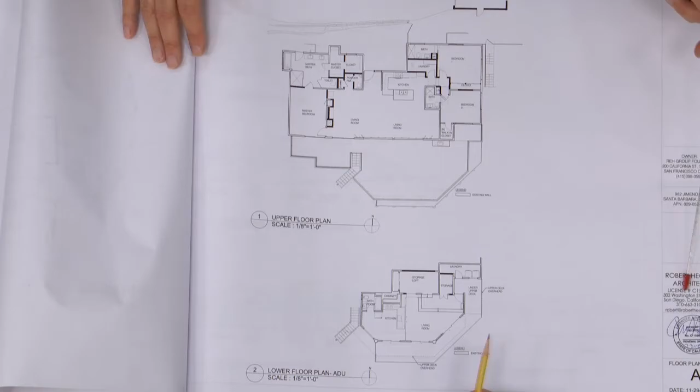Just to be clear, the ADU is where? It's here. It's this whole thing, which is pre-existing, all of it. Okay, and so we're not allowed to make comments on the elevations of that portion of the structure. Regardless, there are no changes. Okay, just so I understand where our limits are. Okay, go ahead.

Other than that, this is the deck above, which is shown on the other plans, which is over the unit, actually serves as a roof of the unit.

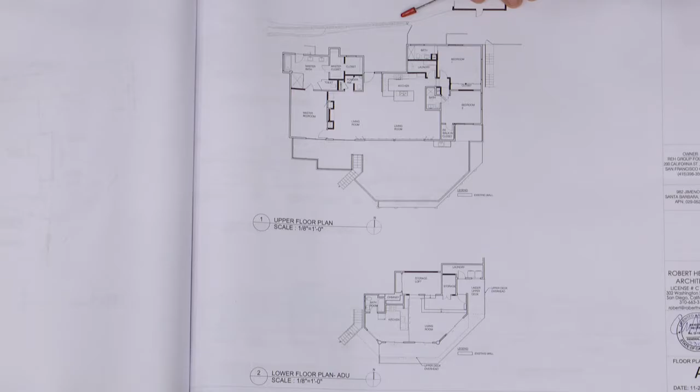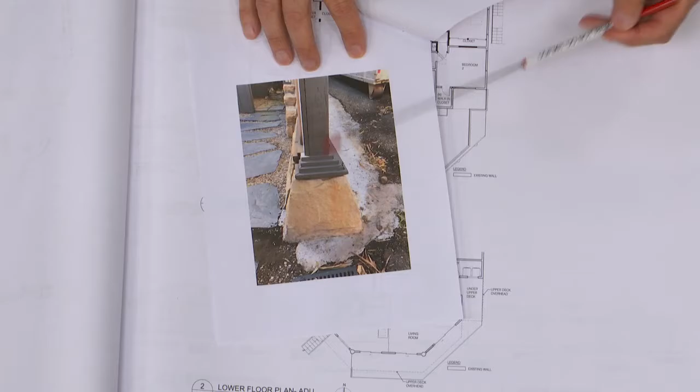This is the wall that we discussed. That was a block wall that was plastered. So you asked me for detail. Basically, we're building a block wall on top of an existing stone-faced base, which is actually a veneer. Within it is concrete. So we remove the wood fence and build a block wall with the facing on top of it at the lower end. Not really sure how deep we need to go because we'd have to dig under it. But this is basically the structural.

And are those drawings on these sets? No, it's a separate. Okay, so...

Did you deal with any stormwater management requirements for the driveway? Well, I talked to the Creek Division, and Cameron, Tim, told me it would be a tier 1 based on information that we had. But what I did do was, I have a bid to do the work, and I put an application with the building department for the driveway. So basically, as before, the idea was simply, it's a broken up driveway, so to put another couple inches on top of it.

So there's some notes and details that have to go on these sheets, which aren't here yet, correct? Just a note. And then we talked about looking at a landscape plan. Yes.

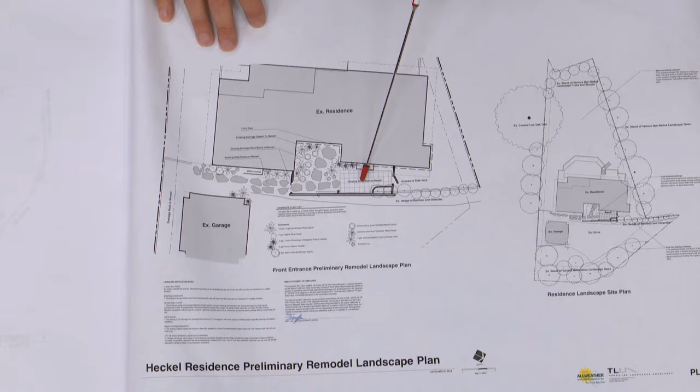So this is the plan that was done by the landscape architect. Essentially, on the backside, we've just cleaned out dead material, as well as here along Jimeno Road and Alameda Padre Serra. So all the new planting is near the entrance, which is really, we're keeping the walkway. There's some permeable material, little concrete squares that you place with space between them. And all this area on both sides of the house and in front is just a lot of gravel, so he's just added some plants into that area.

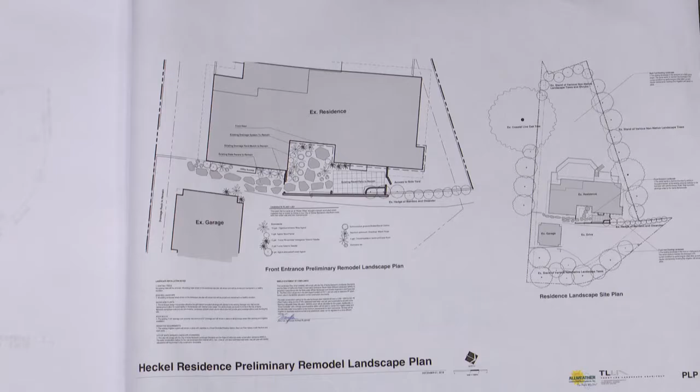And then we wanted to look at a lighting plan and any fixtures. These were included as a handout in the second submittal. Essentially, what this house has now is a closed soffit, plaster soffit, and there are already a number of recessed lights in the soffit, and it has a couple of, three floodlights. So the idea is to put those back as recessed lights in the soffit. Being recessed, they're already dark sky.

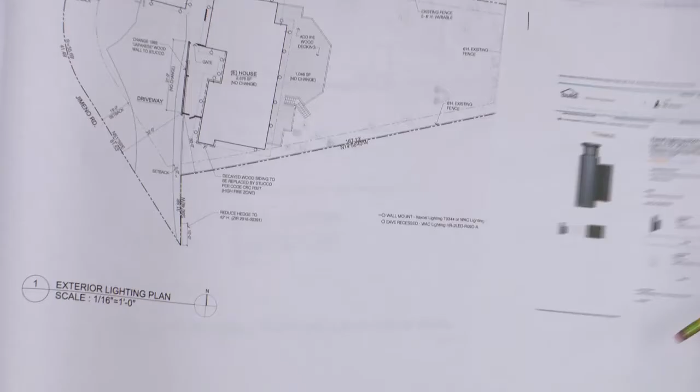We would connect them to an astronomical timer. So then these other fixtures that are on the face, one set has all the functions - it's dark sky, motion, LED. This is the fixture, and the color is a really dark bronze, like the windows. And the other fixture is this one, which is also dark sky LED. That one is going on the more visible front entry area, right here. The other one is for the garage and back over here.

All right, anything else to share? Am I missing any items? I think that answered our questions. Okay, nothing else, then the chair will open the project for public comment. Anyone wishing to address the project can come forward. And David, did we get any written correspondence? No, we did not. Seeing no one come forward, the chair will close public comment and bring it back to the board for questions. Anyone have questions?

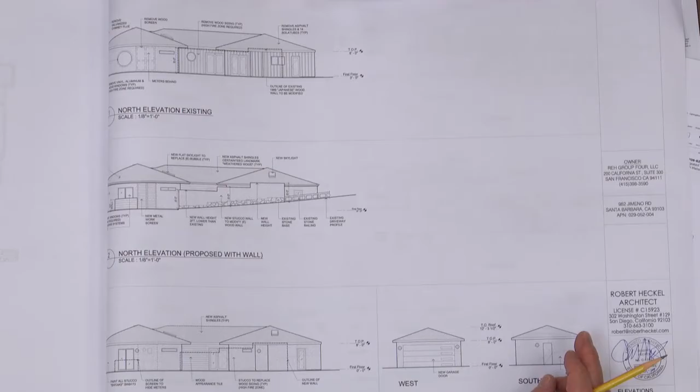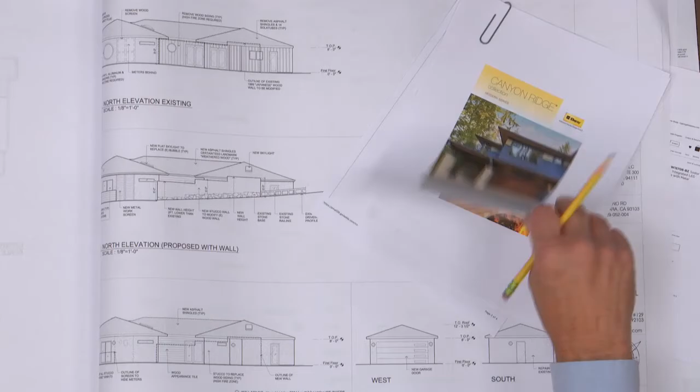Just a couple of details. Do you have any other drawing or catalog cut for this new garage door? Is it on the drawings? I think so. Here we go. So that's the manufacturer. That's not on the drawings though, in this little cut. No, just found the door. Okay, any other questions?

If there are no other questions, let's go to comments. The applicant is here wishing for project design approval and final approval. Unfortunately, because several of his notes aren't on the drawings, I don't think we're in a position to give it final approval. But that might be something accomplished at consent calendar, because it's simply a matter of having him take his catalog cuts and his other information, light fixtures, etc., and getting them onto the set of drawings. Other comments?

Yes, Lisa. Just looking at the front entry - what sheet are you looking at? On the landscape plan, the last sheet. Just thinking about a lot of plants that need really, really dry conditions on the north facing wall there, in the entry, against - barrel cactus and some really spiny things. You might really look at, I can't really tell the scale there, so you might just consider the ultimate sizes of some of those things and having them right next to where people are walking.

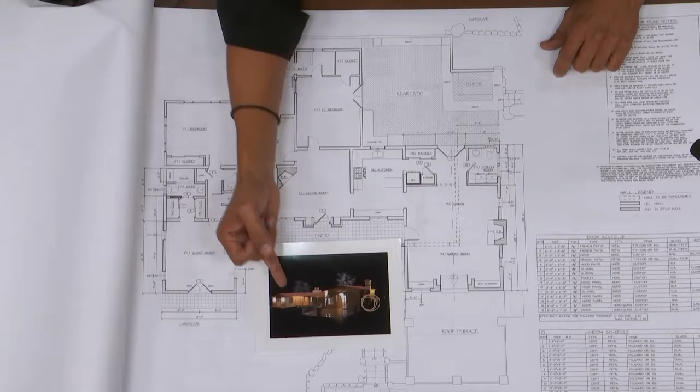One of the comments from the last meeting was about using these windows on the existing kind. I tried to use one of the windows on the new addition, which I did here. I changed this gate, this door from here to here, and created the same style courtyard, which I can show you here. So we're looking at a model.

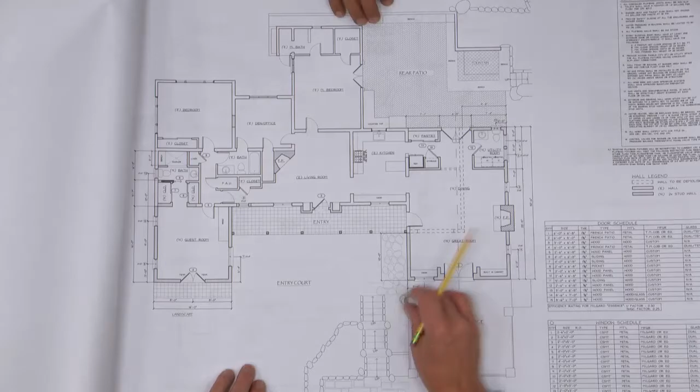Another comment was about the columns - on my former project I took some out, and now I'm keeping the same character. Can we see those on the elevation? Yes. Okay, so that's this? Yeah, that's this.

Another comment was on my vent. Now I'm going to the kind of all clay vents, which go with the architecture. Another comment I recall was on the chimney cap. Correct - for this, it's the existing as it is, I just don't touch it.

Another comment is the lights. Can I change the light? Due to my being unaware of the timing for my meeting today, I wasn't able to bring my lighting style, so I have my phone here.

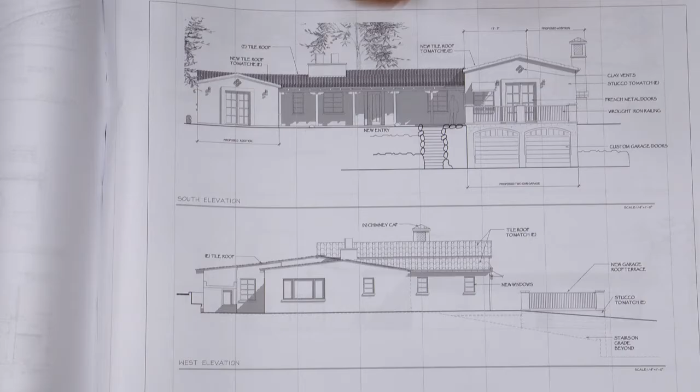Another question is the color. My color scheme is going to match the existing. I don't have any new color board, just to match existing. The color of the existing house is named Extra White.

Anything else? That's it. Is there - and have the details? Yeah, the details are over here. This is the details for the rake, for the eave, some of the railing, and windows and doors.

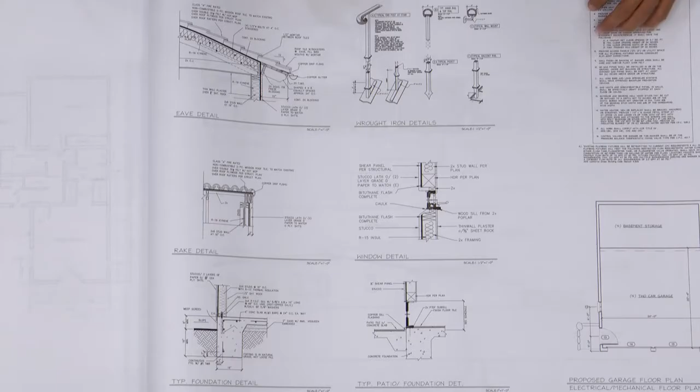Who has questions? I see your photo - here's that. Pass that down to you. This one? Thanks. Anyone else? Are we on questions?

Yes, go ahead. What about the trim colors of your windows and doors? As we can see in the pictures, over time there have been different windows. If we look at the pictures, we see three different windows, but the color we're looking to match is this light gray one - that's a turquoise blue? Yeah, what we might call Santa Barbara blue, which is the one you see on the rendering. Okay, thank you.

I did have a question I just now realized. You said you had a window to that side, where does that show? Let me go up to the floor plan. It doesn't show here, but it shows on the rendering. But it doesn't show on the drawing. Oh yeah, I need to make a section. So you just haven't shown it yet, because it's on the floor plan only. So if we use the photograph, it's that window right there? Exactly, which is right here.

All right, other comments or questions? I think it's a nice looking project myself, so I'm in support of it. Got a neat colors looking home.

And for the light fixture. Nice. That's great, you just need it on the plan. Need you to stay seated and talking into the microphone, this is all recorded and you're on live television. Oh, thank you. Sorry.

Sorry. Okay. Any other comments?

I think my comments are that you've done what we've asked you to do. I think everything looks good. I think it's unfortunate that we weren't able to find a way to reintroduce this style of window somewhere, but because this arrangement's a little awkward, it's really just an architectural decision. From an approval standpoint, it doesn't present problems to me.

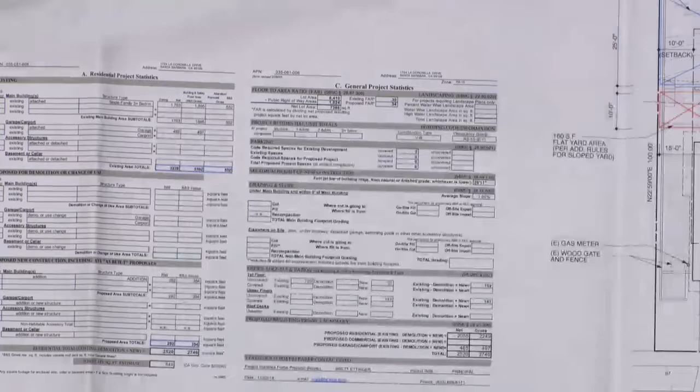What I'd like to do is acquaint you with the immediate context, the neighborhood context, with a variety of photos and a context map that highlights in gray some of the, there's at least 14 within a stone's throw, existing two-story homes. I can pass these around for you if you'd like, so you can use the map to get a sense of where these houses are. They offer a variety of architectural vocabularies, everything from quasi-Spanish colonial to post and beam to sort of a modern ranch-style home.

So these are just to sort of set the mood for neighborhood context. Again, many homes on this street itself and on the adjacent cross streets. I'm getting towards the end here, thanks for bearing with me.

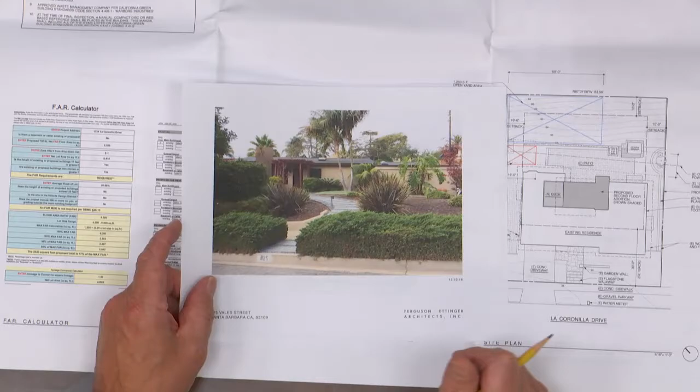In any event, our proposal here today is to add a modestly sized second floor addition to this existing 3-bedroom, 2-bath home. And what we've endeavored to do, I'll turn to the floor plan here in just a second. That'll do it for the photos, thank you.

What we've endeavored to do with the proposed addition is be sensitive to both the immediate neighbors to the west and east, as well as the neighbor directly across the street to the south, and in the bigger picture be sensitive to the neighborhood context in terms of the general massing and our architectural vocabulary.

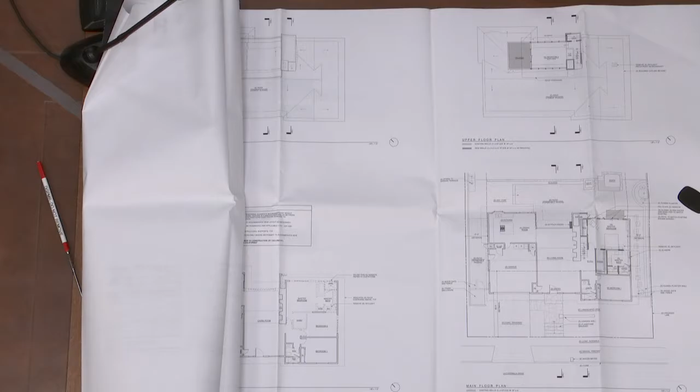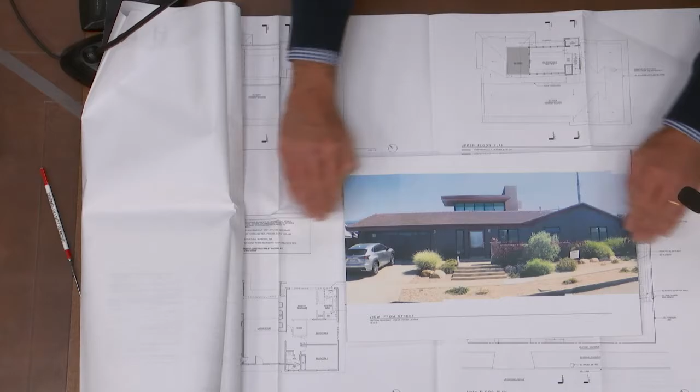So in doing that, do you have the rendering from the street, the proposed rendering? Yeah. In doing that, what we've done for sake of sensitivity is several things. Number one, we've kept the addition small or modest, about 292 square feet net and about 354 gross square footage. Number two, we've placed the addition in the back of the house, about 4 to 5 feet past the existing east-west high ridge line. And number three, we've positioned the addition in the center of the house so that the massing is in the center of the lot and not at the edges or the side yards, out of sensitivity to each of the neighbors.

We've also endeavored to keep the profile as low as possible with an 8-foot plate up above, as well as a flat roof. We've opted for the flat roof for two reasons. Number one, we can keep the profile lower by not using the existing gable roof profile up there. Number two, we can get some larger overhangs, in this case 4 feet to the south, 4 feet to the west, and we believe that will really help during the daytime with a heavy shadow line and further articulate the project.

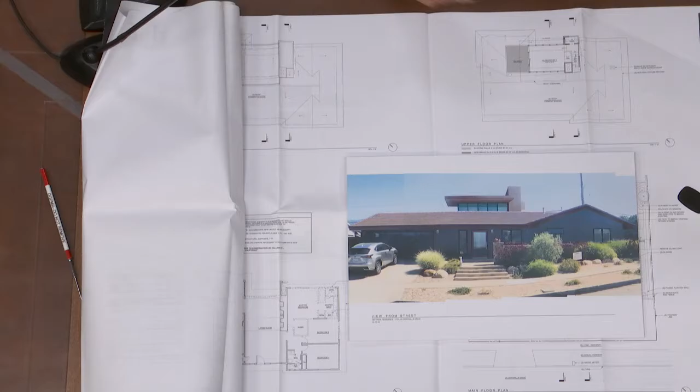In addition to that, the material palette for the existing house—this photo of the house in the renderings is a little deceiving because that brown plaster is in shadow. You have those, here we go. Where they went, the existing house, yeah. Thank you.

Going to be in this part. Oh, it's in there. There we go. That's actually a better indication of the color of the house right now.

But as you can see, what we've tried to do with the addition is not use such brightly contrasting materials and colors, but start with the darker earth tone plaster, key off that, and use it on all the proposed walls upstairs. In addition, to further recede the project, we'll use a dark bronze anodized window frame throughout. To integrate the entire project, we're proposing to paint the existing window frames to match, as well as paint the existing trims and fascia board, so the whole project feels like it may have been done at one time.

I guess lastly, in terms of nighttime appearance, what we're proposing, we have the material board. That's pretty good. That's the real one there. Thanks, Mike.

In terms of nighttime, one, we're not going to be proposing any drywall in the ceiling since it may be visible from down on the street at night and might reflect too much. Instead, for the entire ceiling, as shown in the reflected ceiling plan for the upper floor, we're proposing a medium-toned wood panel to warm things up a bit.

And essentially no ceiling lighting. I don't believe in putting recessed cans and lights on the second floor, so we're not going to have any ceiling lighting in there, just a fan. There'll be one wall sconce and a surface-mounted light at the top of the stairs that won't be visible.

Lastly, just taking the extra step, we'll be using upstairs at least a bronze-tinted glazing, so that at night it will really be quite diffuse, especially with the warm-toned ceiling and no ceiling cans.

I believe that's about it for the presentation. We have some other things here, like proposed lighting fixtures, et cetera, if you'd like to see those. But our goal was to really stay modest, keep things in the back, keep things in the center, keep things low, and use materials that recede.

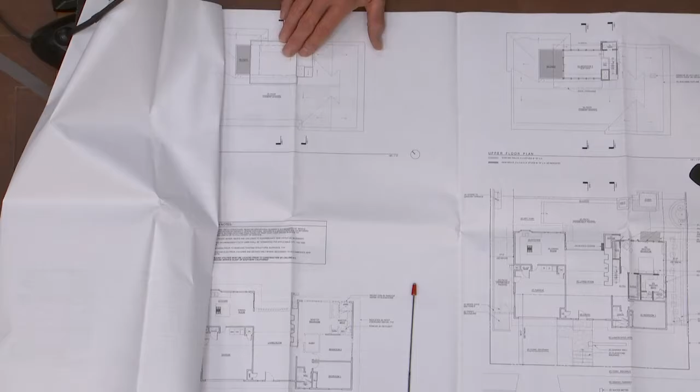Yes, thank you. I am looking at A2.1 and wondering if the roof plan and the upper floor plan both have their own individual decks, and if you could talk about those. Pardon me, I didn't hear the question. I'm sorry, if both the roof plan and the upper floor plan each have new decks? No. The deck, which is enclosed by a 3-foot-high parapet wall, only exists at the second floor level, right off the proposed bedroom. What you're seeing in the roof plan is just the deck beyond. Deck just for below, got it. Okay, yeah, thank you for clarifying that.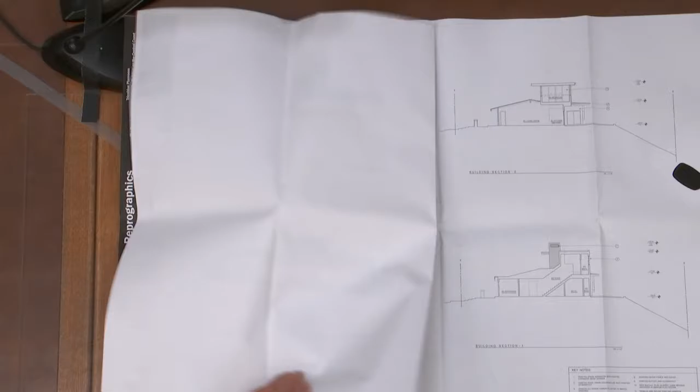I forgot to mention that the deck is sunken into that existing roof about 3 feet. Do you have, while we're there, a section or an elevation to show that? Yes. And we also have a cross-section. Okay, these two cross-sections really don't show the deck, but this one — oh, we don't have it. Okay, so from the street, we're going to see a bit of, is that stuck up? Yes, so that shows up. You really don't see it. Yeah, you don't see it there, but I want to see it on... okay, so that's what we're seeing right here.

So to get your 42 inches, is this an open pipe rail? We're proposing just a simple — haven't gotten there yet — either a metal cap that's 2 inches thick that provides for the 4-inch maximum clearance. So just a single band that's open in between? That's how I'm reading it. Yeah, just for a little articulation there. All right, other questions?

What is the material of the roof, or is that changing? No, it's not. That existing roof is a heavy cement shake. It shows up here for you, you can see it in the photos. It's fairly... 10 years old.

And what are you thinking on the chimney cap? Is it a screen or something? Yeah, we'd like to hide the spark arresters. We'll be looking at painting the spark arrestor and then also putting in a welded wire mesh screen, probably a painted black screen to go along with the other dark elements.

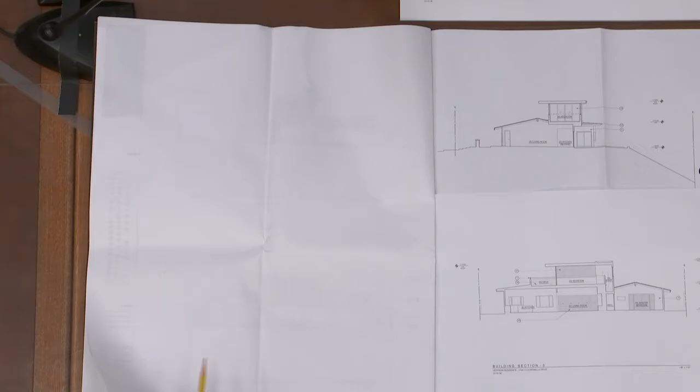And then, under code, are you required to have a light off the set of doors that's coming onto this deck? What we're proposing is just some recessed low wall lighting on the deck itself. You think that'll pass muster? I'm hoping that it does because we don't want to put lights out there. And no lights in the soffit? No lights in the soffit. Or the ceiling? Correct.

And you don't have gutters on the front of the house on the first level, but I noticed there's a downspout gutter here. Is that just for the flat roof? That's just for the contained, parapeted flat roof. And then we have a gutter in the back that has a downspout, so you don't see that from the front. And that's anticipated to paint out to match the adjoining wall? Yes, that's called out, I believe.

And the roof material on top of the flat roof is going to be what? It's a PVC membrane roof. I don't think it'll be visible, but it will be. Do we have a color yet? Not white and not black, so in between - probably a medium gray.

And that's the whole project for our review. There's some other stuff going in the inside, but other than that, yes. And the existing trash enclosure may have already been blessed by the city because of this other work? Yeah, this went through a thorough interior remodel about 8 or 9 years ago, I believe, so that may have been taken care of. And all were modifications for some existing side yard and front yard encroachments.

So David, is this still going through staff review? Is that where we're at this point? Yes, however, if the board finds that the project is supportable for project design approval, you can make those comments to that effect.

All right, okay, other comments? I guess I had one additional question. The neighbor across the street - I was out there this morning just double checking the site. I know the street pretty well because we've looked at several houses, in fact one just 3 or 4 houses down. Has these folks talked with the neighbor directly across the street?

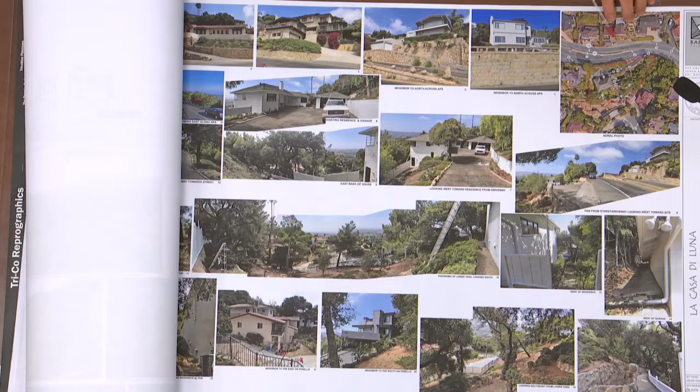So there's an aerial map in the top right corner, which also shows where the photos are. Along the street on the north side of APS, there's a series of 2- and 3-story homes, shown along the top. Our immediate neighbor to the west is also at the top left corner of that sheet.

You'll notice directly across from the site there's a large, probably 10 or 12 foot high median wall that divides the eastbound and westbound sides of APS. It's also significant to note that neither from the driveway across the street looking towards the site, nor from the median looking towards the site, can you see the existing house, nor will you be able to see the proposed work, because there's a probably 15-foot high hedge right at the property line along APS.

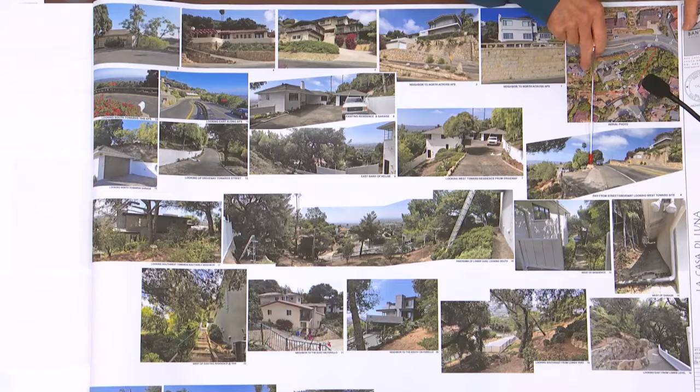Let's see, there's a good view of that. You can sort of see it here, just underneath the aerial photo, where you see both the houses on the north side of APS, the median wall, APS proper on asphalt. Then there's a drop from APS to the site that varies from 0 at the driveway to about 7 feet once you get down to the garage in this location. So this wall right here adjacent to the garage is a 6-foot wall. The garage comes up above it, but then the street level is even above that.

Then there's a variety of photos that take you through the site. This is probably the most revealing in terms of what is there now, the existing house and garage. The site is quite steep, I think it's over a 40% average slope.

Looking from the southeast corner of the site down towards the backyard area of the site is this long panoramic shot, a series of 3 shots. So you kind of get an idea what the backyard looks like.

But there's also this whole section of the site, which is an oak grove, also quite steep, which we're not touching at all. We're not disturbing any oaks, and there's no plans for any development there. But there's also significantly a drainage course that picks up water off of APS and a pipe that comes under APS that drains along the easterly side, then passes over into our neighbor's yard to the east and actually goes under their house, comes out under their driveway, and empties down onto Farella Road down below.

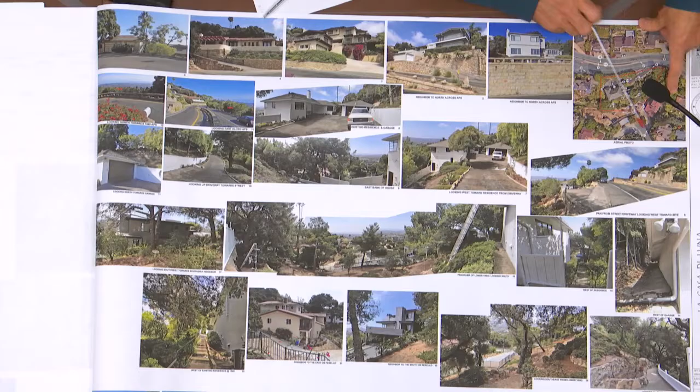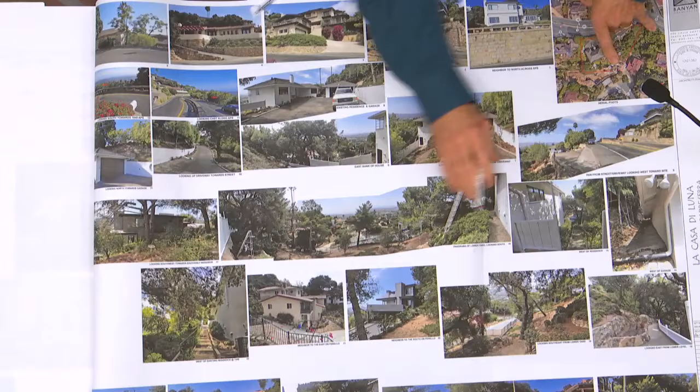You get a really good idea of how steep the site is with these photos taken from down below, bottom left corner. You can see I've labeled here where 1049 occurs. This white building appears in the distance - that's the existing house for this site. And here's Farella Road down here.

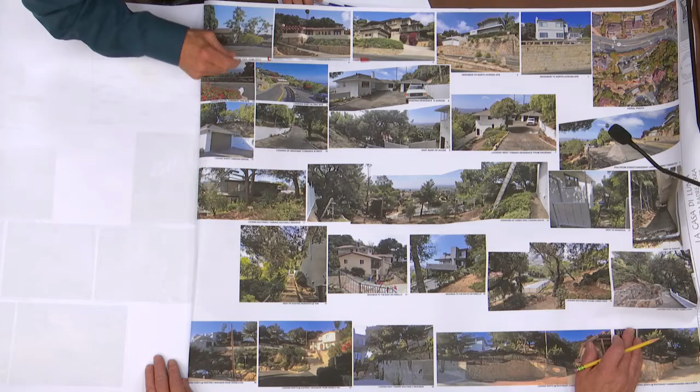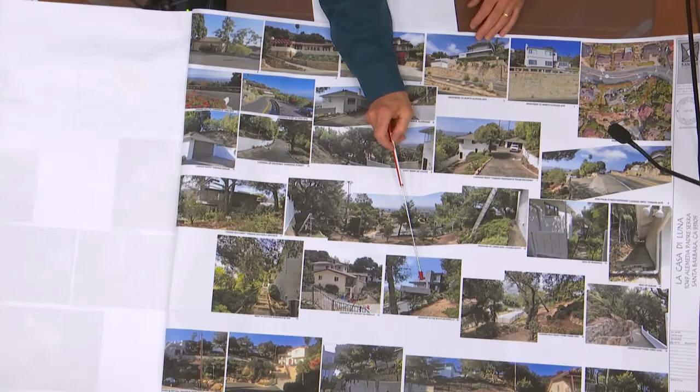So there's lots of retaining and very steep grades up to houses on both sides. This is the house just below our site, which was built in the last year and approved by this board. And this is another shot of the house immediately below us, and the house immediately to the east. Here you get a little bit of that parking area I was referring to, which is also a permeable paved area.

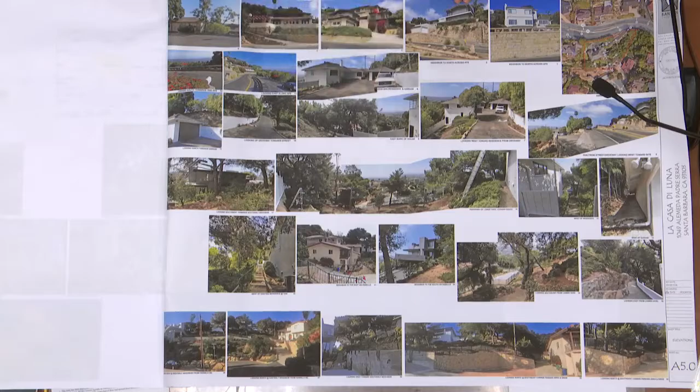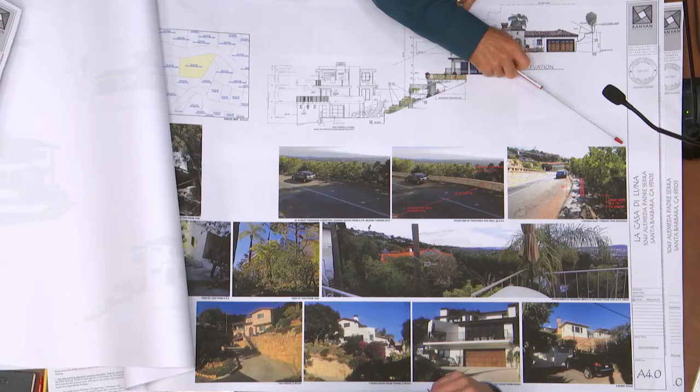We added a few additional photos with this supplemental sheet because part of the proposal is to add a site wall at the street. Currently there's a drop from APS down to the site that varies from 3 to 7 feet, which is unprotected other than this hedge and some intermittent boulders. So we want to create safer pedestrian protection there, as well as protection in case any cars should veer off the road onto the site. This is a photo sim of what that would look like - it's 42 inches high, would be stone to match what's happening across the street on APS, or at the median, rather.

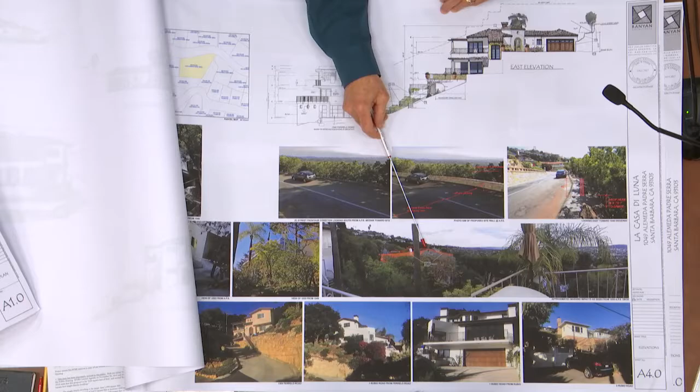Bottom middle of the page, the adjacent property owner at 1055 was kind enough to let us take photos from their site so we could evaluate the visual impact to them for the additions, so you can see how, at least from their viewpoint, the visual impact is minimal. This is also our neighbor at 1055 from our site, looking up towards them. They're roughly 2 stories above us, and this is also part of their residence right here - you get a corner of it.

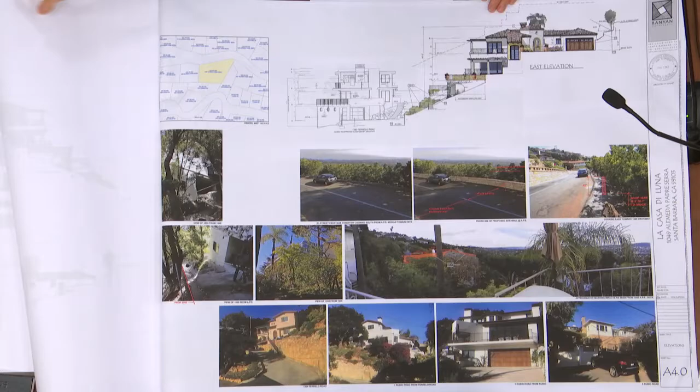Excuse me, sir, this is a public meeting. I'm going to ask you to sit in the seats, please. This is being televised, you'll have an opportunity to ask questions - you get 2 minutes to address the board. Gotcha, okay, so if you could sit back down in the audience, I'd appreciate it. Thank you, continue please.

Maybe I'll just go to that because it's clearly shown there. So here you get an idea of that progression. This is sheet A2 I'm looking at right now.

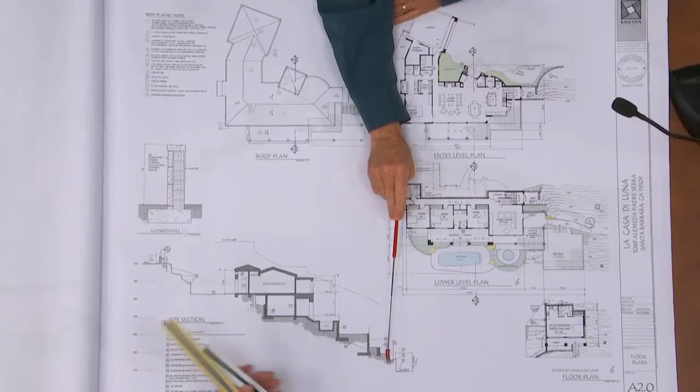Existing driveway of our neighbor shown at the bottom, and existing wall, then the 2 series of 3.5 foot high walls, the 7.5 foot high wall, which creates a flat, usable outdoor area for my client, and then another 7.5 foot high wall, which creates the surface for the pool area.

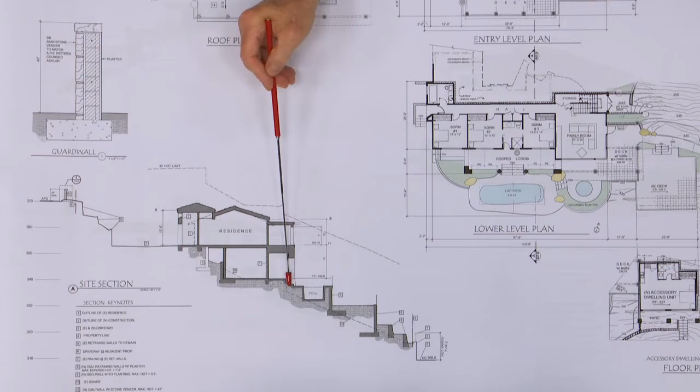But these walls are shown at their worst condition because they are curving. In fact, all of these walls eventually die into grade where they terminate, so they're progressively getting smaller as they go to their ends, which is shown on the elevations.

So again, we took the section through the worst spot, both to the east and to the west. They either terminate into the building or they die into grade as the grade goes up the hill.

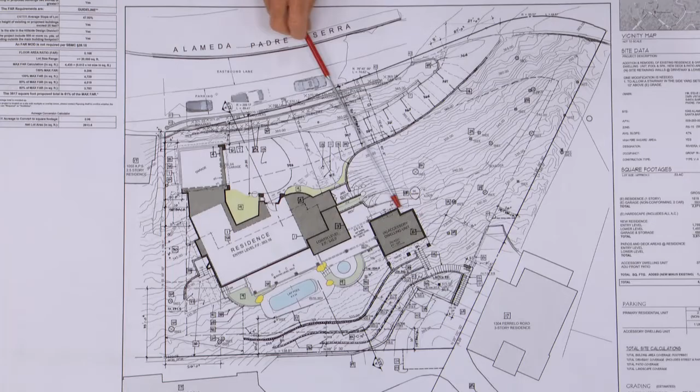Now, although it doesn't fall under the category of needing design review, we are proposing also an accessory dwelling unit. Because it is intimately tied in with the retaining walls, the grading, and the stairway we're proposing, I'll just review it briefly. Basically, it's a structure that's buried on 3 sides, and you can see how that works in the elevations.

Most clearly on the east elevation, you can see how at the upper end we're having to step down from an existing pathway that's there now, and you'll see some steps shown in plan onto the roof of the ADU, and how much of it is below grade.

You can also see that the stairway is basically on grade. So this dark line shown on the east elevation that runs alongside the ADU and picks up and turns into the stairway shows how that stairway is just following along on grade.

The other significant addition to the residence is the entryway, which you can see on the north elevation, and we're incorporating some stonework on the building, as you can see.

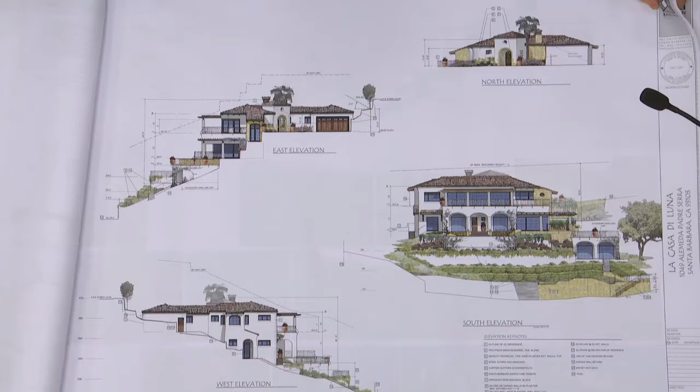Okay, is that your presentation? Yes. Okay, thank you. Before we go to questions and comments from the board, the chair will open it for public comment.

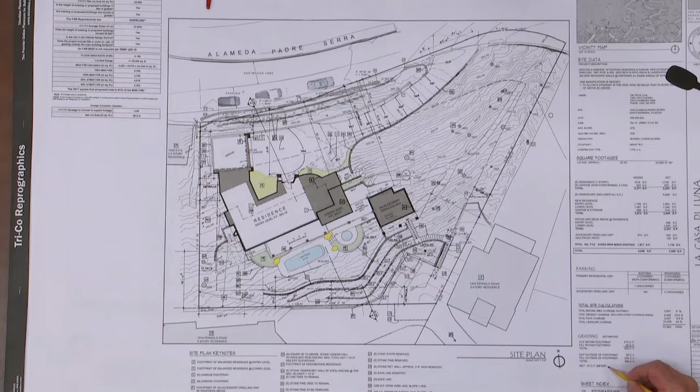I have a question, go ahead. Do you have a general idea how much fill or cut is required? Yes, we did an approximate calculation, it's on the first sheet at the bottom right there. Let's see, 300 cubic yards of cut, 25 cubic yards of fill, for a total of 300... 275. And then that's within the footprint; outside the footprint, 35 cubic yards of cut, 355 cubic yards of fill, for a total of 385. And you're importing 70 cubic yards. So that's about 6 to 7 truckloads. Okay, so the attempt was to get as close as we could to balancing on site.

There is considerable grading, most of it under the house. But yeah, other questions?

Do you know how you might be addressing stormwater management, or is it too early to go there? We've had some preliminary discussions with the civil engineer about it. We are Tier 3, so we will be required, but if we make the driveway and most of the exterior hard surface permeable, it's very likely we would not need to retain the water on site, just percolate it on site. We have areas for doing that, given the retaining walls we're putting in. So that's the general plan.

Okay, other questions? I have a series of questions. You referred to the hedge up on APS. Is that hedge on the property or is that in the public right-of-way? I think it's those. That's a good question. Looks to me like it's all, except maybe a little tiny bit right here, that we're all on the property.

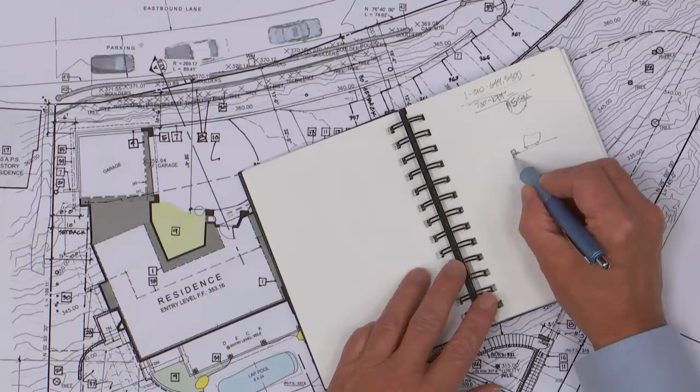So what you have is this is APS, and this wall drops down, or right now it drops without this wall. You can see it on the section that shows it, and the trees are clearly like that. And so that's what we need to understand. Does he need to get a zoning exception, et cetera? So that would be part of your review?

Yes, the applicant did put in a request for evaluating the height of a wall to be considered at the street level. So I will check in with our zoning staff on whether or not that hedge would also fall into that same criteria. And then my other question is, it appears that a portion of this new retaining wall, that's the stone wall you showed.

That's this right here, right? Yeah, it's not retaining, it's just a guardrail. Okay, and so part of it appears to be proposed in the public right-of-way, and part of it is on your property, correct, within 10 feet. And as long as it's below 42 inches, you're okay.

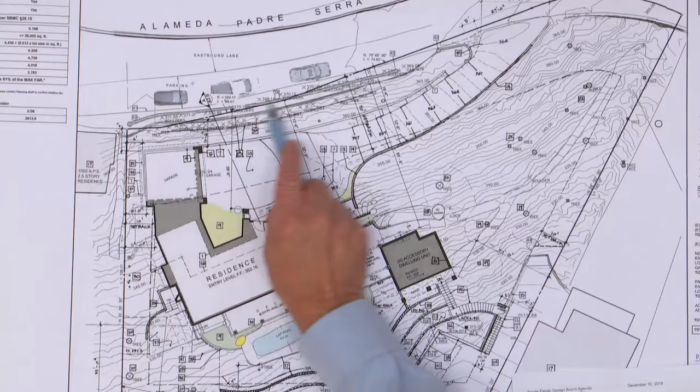Have you talked to Public Works about this piece? Yes. Okay. They said that it's quite feasible with an encroachment permit that we could be able to do. And do they review the structure of that, or is that all under the building department? You know? I would imagine they would review the structural engineering as well, but I don't know.

And then we talked about this easement that kind of goes back and forth between these two properties. It doesn't show on this plan. Do you? It does, actually. Where did I miss it? Well, there's two, actually. The first one goes like this and came all the way down to here and did this little flag at once. So this was the original easement, which allowed our neighbors to access their driveway across my client's property. Okay, so that's the driveway easement.

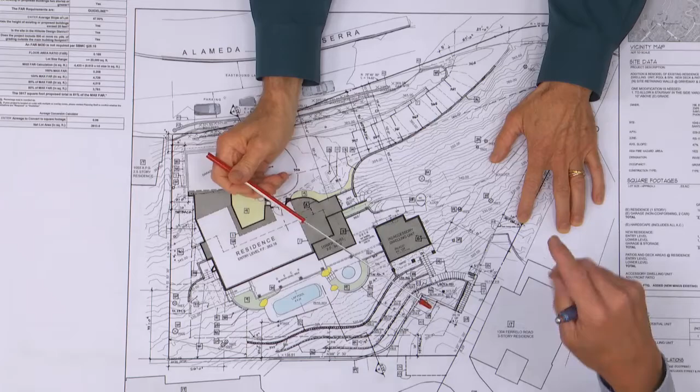Yeah. What about the drainage easement? There's no drainage easement. Well, you have a pipe that's discharging water somewhere. It comes right here. So there's no easement though? No. So the water just runs down here and then daylights, or keeps going this way? It daylights all through here, and then somewhere around here it goes underneath their deck, and then it comes out right there.

And it's my understanding that the way this works is that water's being taken from the other side of APS, under APS, down, and because this is surface, it does take whatever contributory water is coming off of here into that drainage course. Right. But any work that you're doing over here, under the rules, you have to retain all that water on site, correct? Right, correct. Okay, so from about right here where this grade starts to change, as the contours start to change, this side is going to be evaluated under Tier 3.

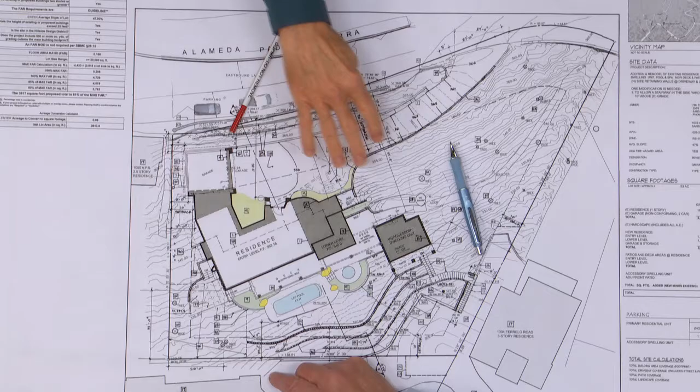Although it's unclear as yet, and we have to evaluate it, there are currently drain lines that take site water into this drainage course. That's got to be evaluated, because historically this site has drained in that direction.

I would assume we'd be required to reduce whatever that amount is, and maybe eliminate it if we can, to whatever extent possible. But there's a portion of the site we're not touching, which drains in that direction, and we would not be affecting it. It's historically always done that.

Under state law, we're not allowed to review any of the accessory dwelling unit. But David, given the extent of landscaping, retaining walls, etc., when this comes back to us, could we get a definitive answer on how far our review goes? The last understanding was we can go up to the wall of the ADU in terms of landscaping and hard surface, so please confirm that.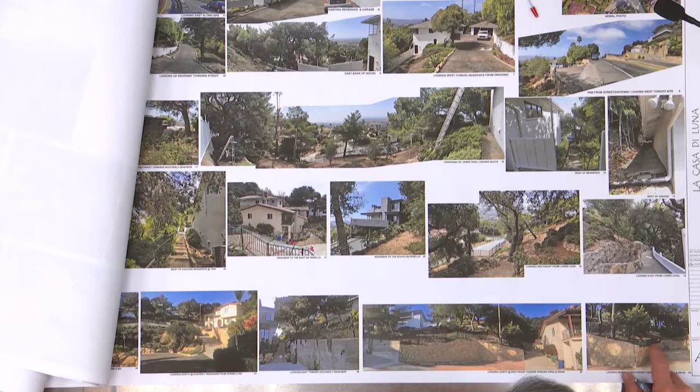Currently it's roughly a 4-foot-high wall, although it travels up the driveway. So here it is right here, that's what's existing. Okay, so we're cutting in. Our stairway is going to start at the surface here and go up to there. So are we going to see a continuation of the stone on that side? And there is an elevation.

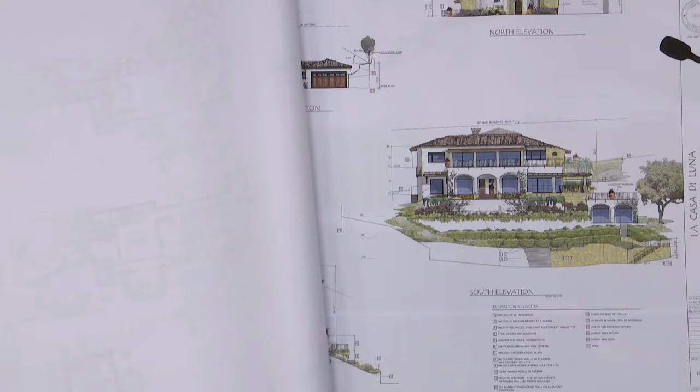So there it is, right here? Yeah. Okay, so we're going to see a continuation of that whole stone surface and the railing, and then it goes up and there's a gate. Which doesn't quite show on that sketch, I guess, or if it's there, I can't see it.

The geo walls are here and here. Okay, and you haven't determined with your engineers yet whether that's the final fix, you're still working on that? No, we think it's working well, but we're subject to the approval of the board, so...

You have some green shaded area there that indicates new landscaping area. I'm assuming you're going to have new landscaping in here? Yes, it's all landscaping. Okay, so we don't have a landscape plan yet? No. Okay, so that's coming? Yes.

And then the plate height, I want to understand what's going on. Sections or elevations? Okay, I guess I can go from here. So a couple of things: the roof pitch is changing slightly, from 5 and 12 to 4.5 and 12, so that drops down a little bit.

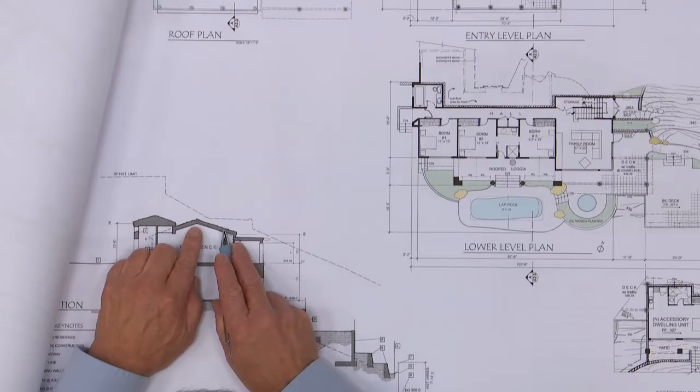And the current plate height of the residence is 8 feet, and you're pushing that to 10 feet for the whole second floor, not just a certain portion? Right, it's the whole thing. And then the plate height for this little entry tower has gone to 13 feet 6 inches. Okay, roof pitch on that one.

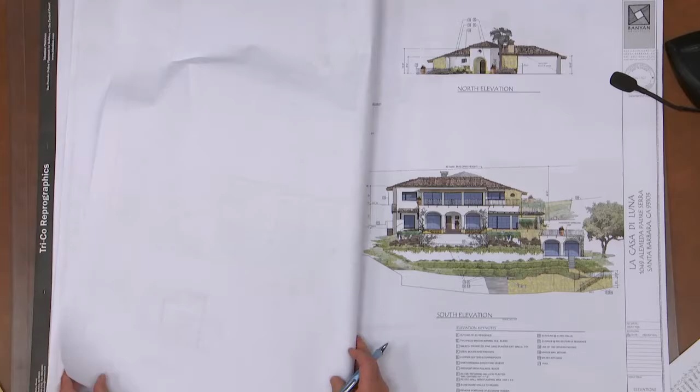I think the other ones I have are for comments. Okay, I think those answer my first set of questions. Anyone else with questions?

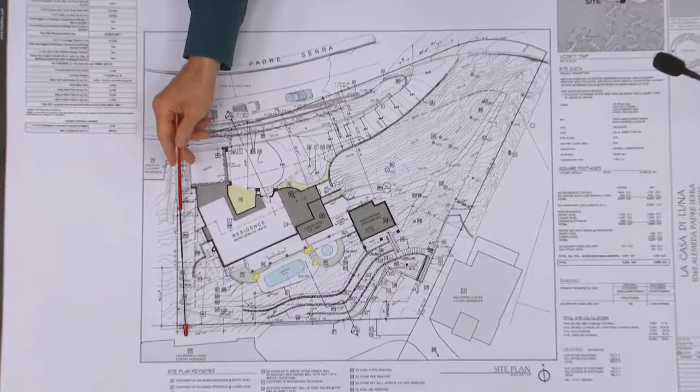Let me just mention one thing very briefly. Currently there's 2 large stone pine trees right here, which provide significant screening between the 2 houses, and we're not touching those.

I mean, we can study this further in terms of providing privacy, but we're not going to do any better than these because they're 30 foot high and have canopies probably 25, 30 foot wide.

Okay, alright, comments. I'm gonna just set some background here. I think two of us were here when we reviewed this house, and that was an extensive review process. We had many neighbors here, some of which are here tonight, to review this project. They hired an attorney. There was a lot of effort to make this house work with all the other houses, and a lot of the folks that came were in these houses up above us. So I'm hoping as we go through this process, we can continue that aspect of resolving approval of a design that's going to be compatible with the neighborhood.

So I'm going to urge board members as we go through and talk about this, and at the point we have to make findings for neighborhood compatibility, to be very definitive about the things that you see and make sure that goes in any motion that we make. Because there are a lot of pieces in this. One of the things I was checking is that it appears the way this has been drawn, there's a 12-foot clearance between the face of this house and this stone wall.

So my question, I think you answered it, but let me double check. The stone that's there now is right here, correct? It's right, we're not encroaching any further onto the driveway. Okay, so that stone wall is exactly where your staircase is going to start and go backwards. Okay, alright.

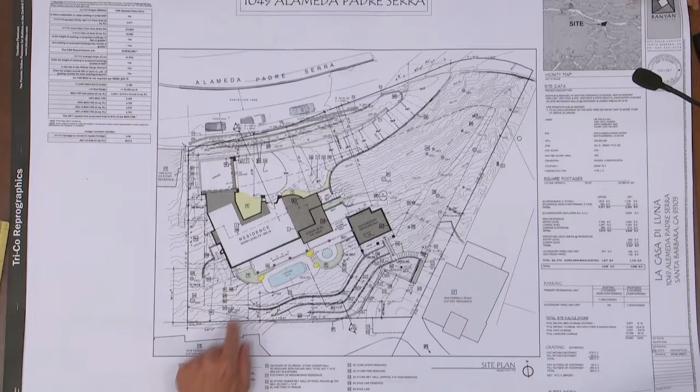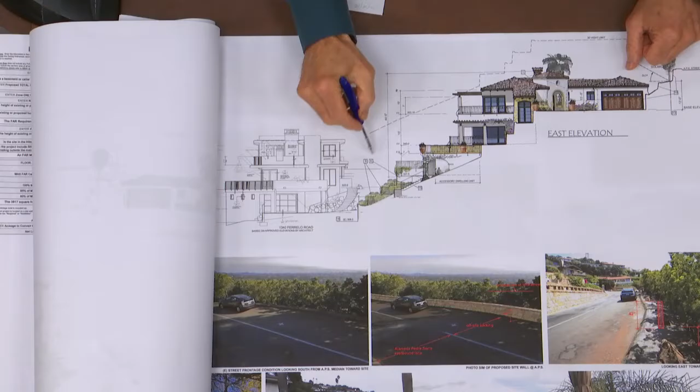If I could just mention that we did include — I know you have photographs. Yeah, but there's also a section. That's why I included this additional east elevation, because I took the architect's drawings and showed the relationship between the houses. So if you could take this same thing and show where those pines are, that would be most helpful, so we can understand what windows might be affected.

This board does not have purview over individual views from individual windows. The city attorney has advised us that that's not something we can make definitive measures on, but the board does work to an effort to eliminate as much as we can any window-to-window privacy issues between two properties. So that's why I'm asking for the information.

From a code standpoint, and I'll look to you, Mr. Green, as the architect, and to staff to answer the question the neighbor had about the volume of water in the pool and how that's dealt with under the seismic code, so they can have an understanding of how that works once that pool is in.

One of the questions I have under the code, you're required to have a child-proof barrier around the pool. Have you worked that out yet? Do you know what you're doing? Well, not in detail, no.

Okay, so when you come back, that'll need to be defined so that we can look at what that may look like. The other thing that I'm always careful to look at on Riviera homes is the amount of deck area exposed to the city. I was up this morning on Ferrelo Road, reminding myself what this little section of the street looks like, particularly down from Ferrelo Road. And this house currently has a very dominant exposure to the city, to Ferrelo Road, and to the roads below that.

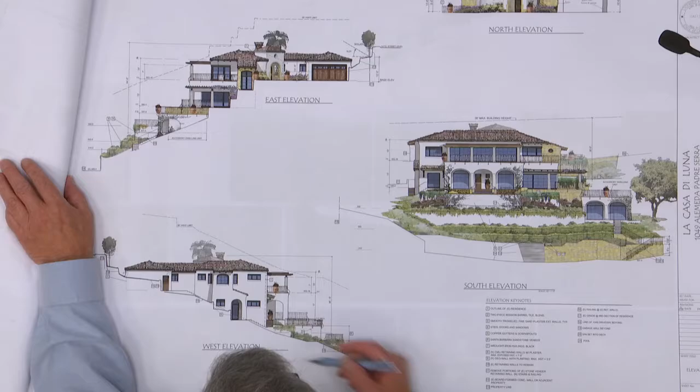I'm not convinced on this big window on the tub in the master bathroom. I know people like to have those, but I'm not sure that's what we should be doing in a densified city as we continue to build out.

And I guess I'm also not really convinced about the 10-foot plate height on that first level. You know, we see all kinds of projects come into us. Everybody wants these 10-foot ceilings, 9-foot ceilings, and it just pushes the whole bulk of this house way up. I know you did a photo montage to show the impact, but it's not just these folks.

We have to look at it from the city's perspective. We keep getting bigger and more mass on the Riviera every time someone comes in and basically buys a teardown. And I realize, oh, you're remodeling, but this essentially is acting like a teardown. So we're getting bigger, bulkier homes on the Riviera, and I'm not sure that's where this city ought to be at the moment.

So I guess I'm not sold on the 10-foot plate height. 13 is a given, that's where it is. We've seen some projects come to us where perhaps the living area is the 10-foot plate height because it's a bigger room, it needs the proportions within the space, but we get some of the other rooms dropped down, and that might be a solution to this bulkiness that tends to occur when we start adopting these blanket plate heights.

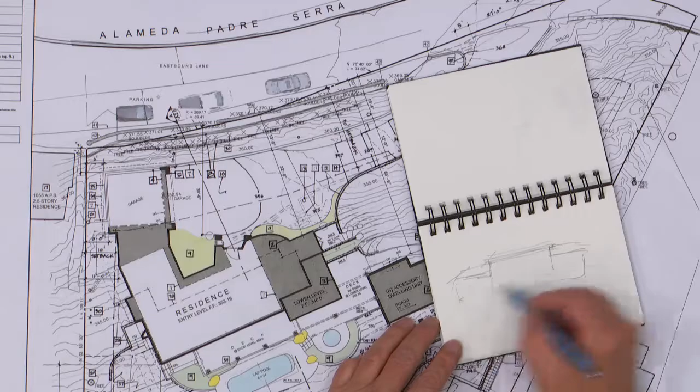One of the things, Kurt, that you might fall back on is Julia Morgan did 3 houses this size below the main Casa Grande at Hearst Castle. The middle house is very much in the flavor of the architecture you're proposing, which I think the board has indicated they appreciate. But I think the middle house she did, she lowered the 2 wings on each side, and then the main living area is in the center, and that pops up—that might be a way to approach how you solve the 10-foot plate height business.

Take a look at it. It's a really nice proportion. I'm sure you have a Julia Morgan book at home. Yeah, check it out. I think that could be a way to deal with the mass of that facade.

Okay, any other comments to the motion on the floor? Okay, if not, all in favor signify by saying aye. Aye. Aye. Opposed? Abstentions? So carried. Okay, we'll see you back here. Okay, thank you. Thanks.